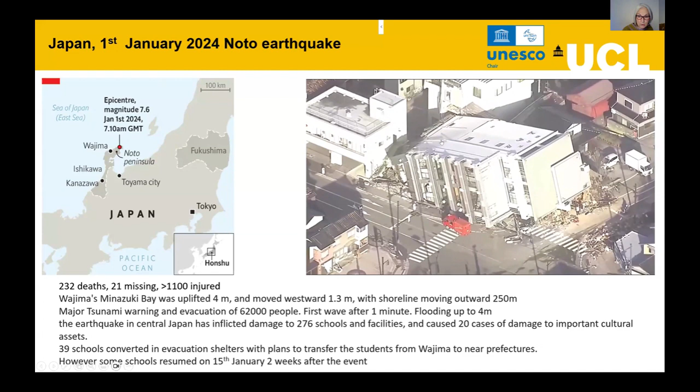Interestingly, 39 schools in the Wajima area were converted to evacuation shelters, with plans to transfer the students from Wajima to nearby prefectures so as not to interrupt their education. And quite interestingly, some schools managed to resume education after the 15th of January, i.e. 2 weeks after the event.

As some of this audience may know from our previous conversations, why is that? We have done work on trying to minimize education disruptions. This was a project that we ran with UNESCO Paris in the Caribbean, and the project has now concluded. You can actually access the results on this link, which will be in our recording.

Basically, we are looking exactly at what the immediate aftermath of disruptions to educational infrastructure is, in the aftermath of an earthquake or flooding, and how we can shorten the number of days that education is interrupted through preventative measures, mainly by better retrofitting of school facilities.

Very interestingly, in several areas it has been said that the peninsula of Wajima is a relatively less urbanized and more provincial area with an aging population, and therefore fewer resources are being put into retrofitting buildings. This would explain the widespread damage that we have seen in this earthquake.

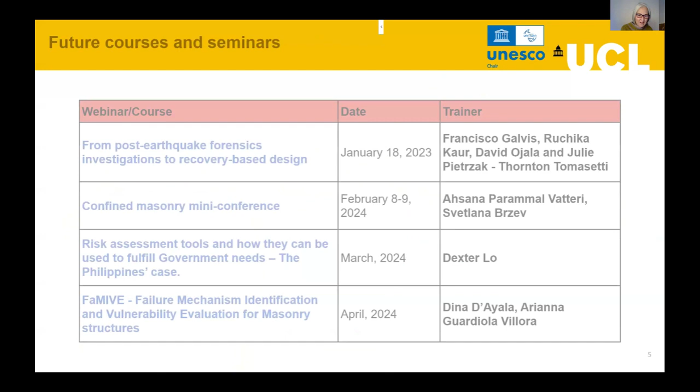Indeed, this approach is part of the talk, the issue of assessing buildings and preparing and increasing resilience. You will see that it's quite an interesting part of the conversation we will have today with the colleagues from Thornton Tomasetti.

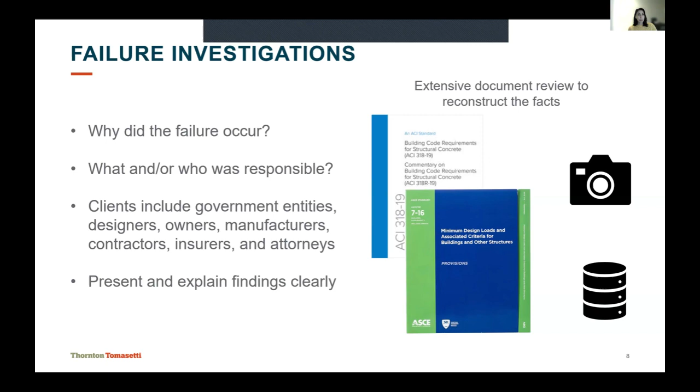Another example of somewhat a failure investigation is emergency response and stabilization. So anytime after a disaster or failure, we come to site and stabilize the structure. We define that as this area.

I'm going to show a video of a telescope collapse, the Arecibo Observatory telescope collapse in Puerto Rico. I'm not sure if you guys are aware of this, but this happened a few years ago. This is a single dish radio telescope in Puerto Rico, and it actually was featured in one of the James Bond films, so it's somewhat famous.

This telescope weighs about 900 tons, and it's 305 meters wide.

Initially, when we were engaged on this project, we were told that only one cable had failed, so we were asked to look at the cable that had failed. During our investigation, a second cable failed. At that point, we started doing calculations for the loads on the other cables and determined that if no repairs were done, this satellite dish or telescope could not hold the load any longer and would eventually collapse. On the day of the collapse, we actually had a drone inspection, and we also have a video of that.

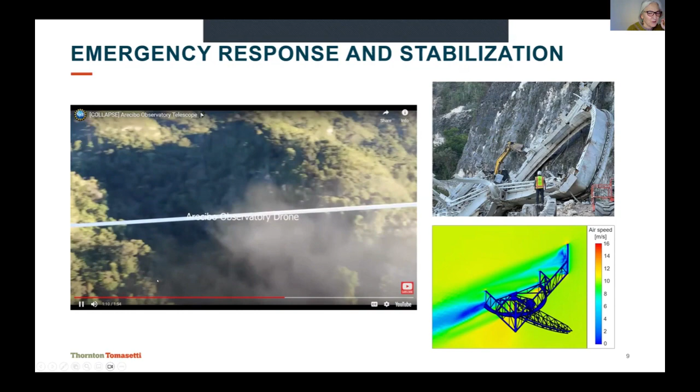So this is showing the failure at the cable socket. We served as the engineer of record and provided an investigation, forensic analysis, and repair recommendations for this failure. We also determined the cause of the collapse and oversaw the demolition for this site.

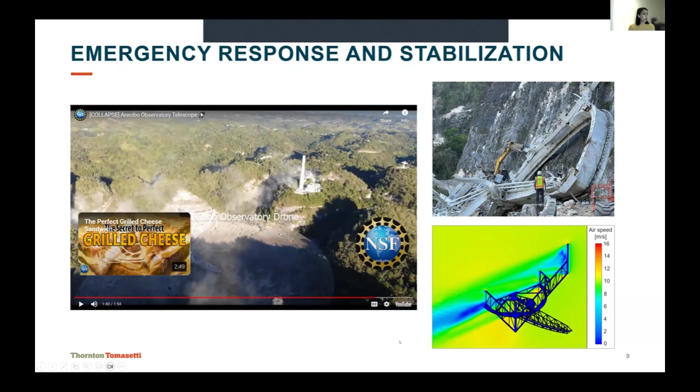Another part of our firm does advanced analysis. It's essentially using scientific approaches to solve more complex problems that go beyond the usual. We're using structural mechanics and experimental mechanics to do this. We're using linear and nonlinear analysis to characterize the static and dynamic behavior of structural systems.

I have another video, and this is an example of controlled demolition. This was a partial collapse at Hard Rock Hotel in New Orleans, Louisiana, about 2 years ago now. Our team responded when the structure was unstable. So the structure during construction was unstable, and also there were 2 cranes on top of the building left dangling. So our team came up with a plan and used explosives to bring the cranes down. One of the major goals we had was to protect the adjacent buildings.

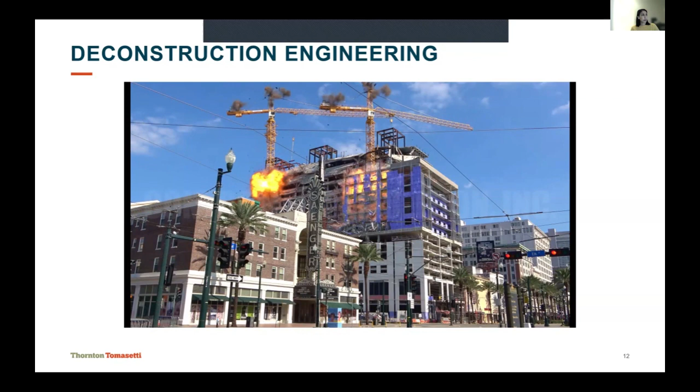So when we decided to use explosives to bring down the crane, we did models and analysis, and the results aligned well with our expectations, and we were able to protect the adjacent buildings from further damage.

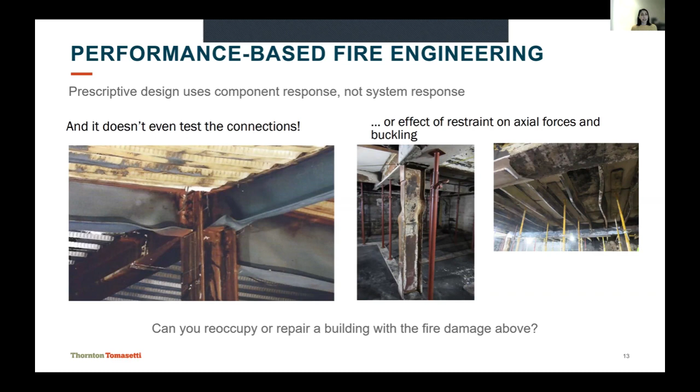Quickly, another thing I want to mention, part of our practice also does performance-based fire engineering. Just like we design for earthquakes and winds, we also design for fire. In the code, there is a prescriptive design that uses component response and not necessarily the system response. It doesn't test connections or the effect of restraint on axial forces or buckling. When we do performance-based design engineering, we're using realistic fires and understanding realistic structural response. In the end, this analysis is helping create a more resilient and safer structure.

So I'm going to move on to the second part, which is lessons from forensics projects. This is based on my experience in Christchurch in New Zealand. I'm hoping this can showcase how recovery can happen after a disastrous earthquake.

Christchurch, New Zealand had 3 major seismic events within a year, known as the Canterbury seismic sequence. The first seismic event was a 7.1 magnitude earthquake on September 4, 2010. The damage was relatively minor throughout the city or even the country. The second earthquake happened on February 22nd, 2011. It was a magnitude 6.2 earthquake, but the epicenter was relatively close to Christchurch Central Business District, and it was a shallow earthquake. It was quite disastrous for the downtown or the CBD area.

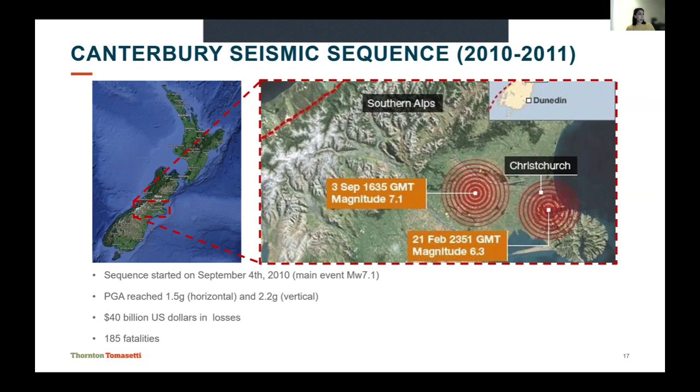Here is an example of a recovery process for a building that was insured. In New Zealand, the majority of properties had insurance, and in some ways that led to a lot of disputes and delays.

There was a particular phrase in the insurance policies requiring buildings to be reinstated substantially the same as when new. That little phrase caused a lot of dispute between owner expectations and what the insurance carrier was willing to pay for repair.

It was a 7-story commercial building in Christchurch, New Zealand, close to the Central Business District, designed in 1985. The gravity system was precast, pre-stressed beams and cast-in-place columns. The lateral system was an eccentric concrete shear wall, shown in the highlighted region, the 4 walls at the bottom of the page. The foundation was bulb piles and tie beams and spread footings under the columns.

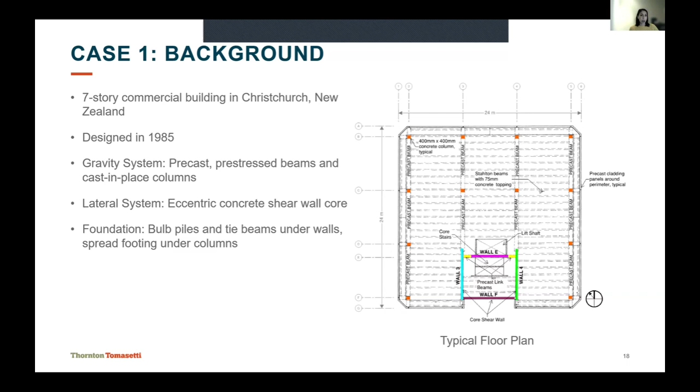This type of construction was pretty standard in New Zealand. They used a lot of precast and pre-stressed members, and concrete was pretty widespread.

We were engaged in 2014. Just a reminder, the Christchurch earthquake disaster was in February 2011. We were engaged in 2014 to assess the extent of earthquake damage, provide repair strategies, report the building percent NBS, and provide any conceptual strengthening.

That percent NBS—NBS stands for New Building Standard. It was an assessment of an existing building against current building standards and code load forces: what could the existing building withstand using current loads? That percentage was defined.

Anything less than 33% NBS was considered earthquake prone and required strengthening for reinstatement of the building. So it was important for us to identify if this building was earthquake prone during our repair recommendations. Here's some of the damage we found during our investigation.

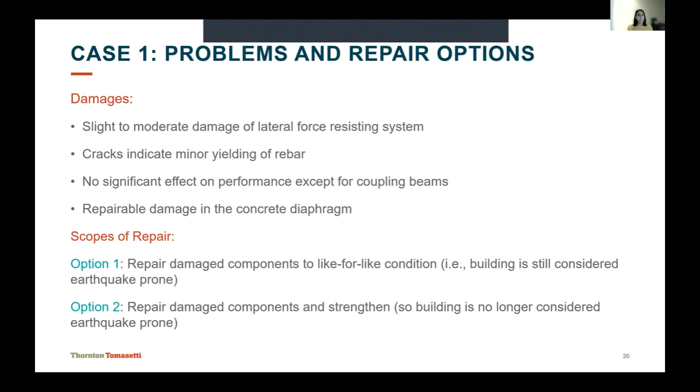Now, I think this is the more interesting part of the recovery. The earthquakes happened in 2010 and 2011, and we were on site about 3.5 years later evaluating this building. Between those years, there was a lot of work going on, and this is what was happening.

Initially after the earthquake, from May and June until November of 2011, investigations were done. An engineer was engaged who did post-earthquake structural inspection work. There was geotechnical investigation done, and a verticality and floor survey done. The geotechnical investigation proposed installation of steel screw piles to reduce the risk of liquefaction in future events. Even though this building hadn't settled, there was a risk of liquefaction they wanted to prevent for future events.

Then in May 2012, there was hardness testing of reinforcing steel done, to see if there was any yielding of the rebar or not.

Then in August 2012, a Royal Commission report came in. This mattered because it opined on the performance of eccentric shear core walls, essentially saying it was an undesirable system leading to an undesirable flexural-torsional response, which could initiate shear failures in the core walls.

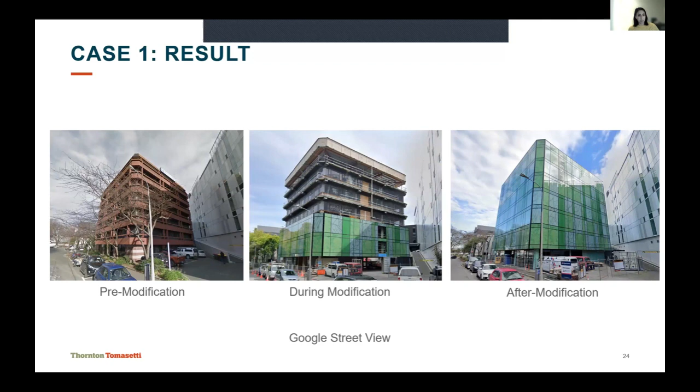So this one was also a building in the central business district that I looked at. It was a 14-story hotel, and it had a 3-story podium adjacent to it that was seismically separated. It was built in the same era as the previous one, in 1986. It also had precast interior concrete beams and columns. The lateral system was cast-in-place perimeter concrete moment frames.

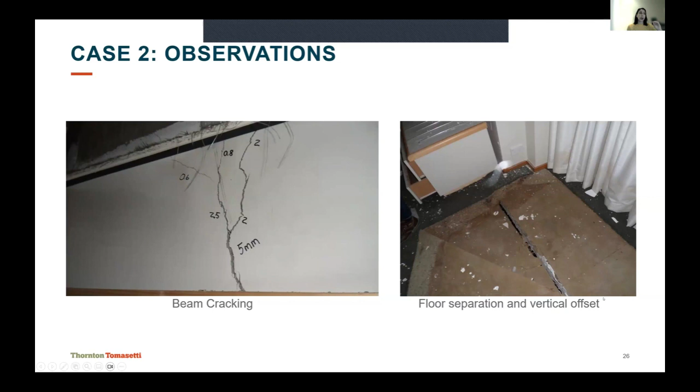As I was mentioning, precast stairs were quite common also in these buildings. In this particular building, on one of the stairs, the entire run of the stairs dropped. The connection at the landing pulled out. And the remaining stairs that were still there had quite extensive cracking. There were lift core walls, elevator core walls, that had extensive damage at the top floors. There was a lot of spalling and cracking. In this particular building, we did find the top 3 stories had a lot more damage than the lower floors.

As part of the study, we did a verticality survey, and there was no pattern in the horizontal offset movement. We also did a floor survey, and we found there was a perceptible and measurable slope towards the middle section of the floor, and it was worse on the top stories than the lower floors. This could be attributed to shortening of lift core walls caused by the structural damage. We didn't find any damage in the basement or at the lower floors that indicated that the foundation had failed.

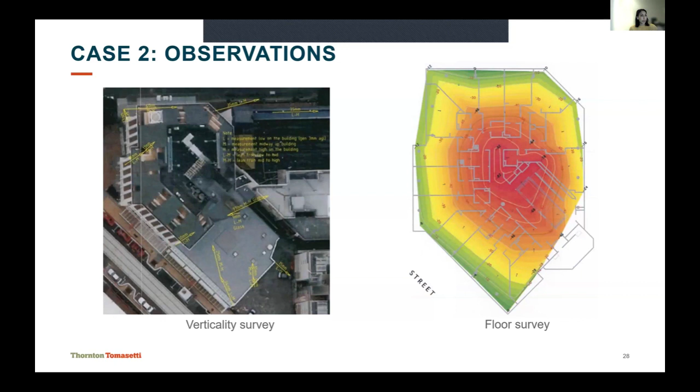So part of this exercise was understanding the extent of damage in the entire building. When we were looking at this hotel, everything is covered in finishes. So we had to estimate the extent of damage from the limited finishes we removed. So here's the extent that we estimated. For the tower building, we estimated 30 to 50% structural damage. For the podium building, there was less damage, so about 10 to 20%. And similarly for non-structural, we created percents.

We also did a study to determine the NBS, which is what percent, whether this building was earthquake prone or not. Our initial findings were that this building was not earthquake prone. It was about 40% of new building standard. We provided repair schemes, which included epoxy injection of beams, replacing moment frame beams that were extensively cracked, removing and replacing the entire topping slab, and then new concrete columns and walls on the top 3 floors. So we were just removing the top 3 floors and replacing them. And all the stairs were being replaced as well.

So based on that, a cost estimating exercise was done, and these were the results. The cost estimate for the tower building, the 14-story building, was that it would cost about $36 million to repair the scope that I just described. And there's a little asterisk to it because there are what we consider risk items that are not fully defined, which included additional moment frame replacement that we weren't able to see. There could be additional diaphragm cracks that we weren't able to see. Same thing with beam cracking.

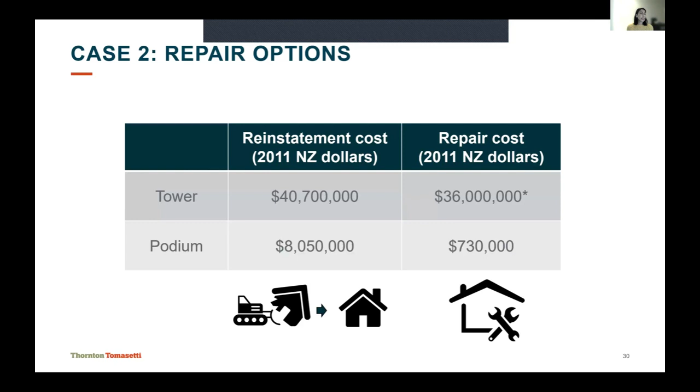So after this study, we were on site soon after the earthquakes. The earthquakes happened from September 2010 to June 2011. We were on site from June to September 2011, issued a report, and ultimately the decision was made that the building would be demolished. So the owner got, give or take, $40 million to repair or rebuild the buildings.

The owner decided not to rebuild the building. To this day, the site is empty. So here's an image of what the building looks like: the 14-story hotel, well, this image is from 2017, but in 2011. The building was demoed, I think, around 2013. And here is where the building would have stood.

I just want you to note the surroundings. Christchurch originally had a lot of brick infill construction as well, and a lot of concrete construction, which you can see from here and here. As of today, the latest image we have, nothing has been rebuilt on site. This is 10 plus years later, and the surrounding sites look quite different. As I was saying, the rebuilding in Christchurch is using a lot more steel and glass, which wasn't what was used 20, 30 years ago.

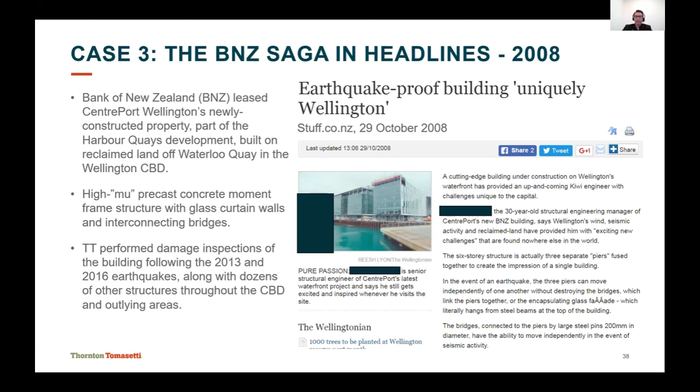By 2014, the building hasn't been open all that long and we get this headline: 'BNZ building faces a quake poser.' And if you're an American like me, I had to Google this one—a poser is a particularly difficult question or puzzle.

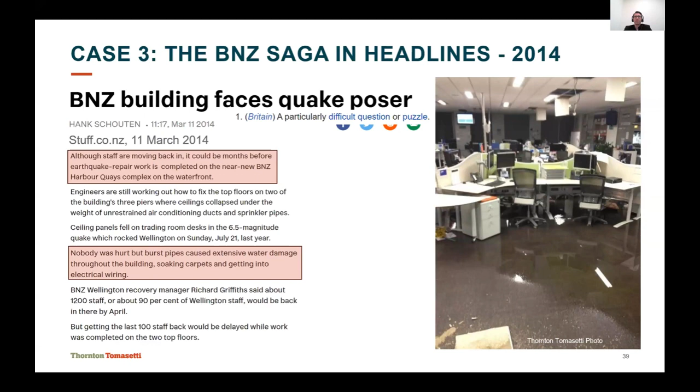After the 2013 earthquake, as you can see from this photo, there was very extensive non-structural damage. It occurred during off hours, but this really could have been pretty hazardous—relatively lightweight hung ceiling finishes, but also a lot of ductwork and cable trays came down. This article from 2014, about 9 months after the earthquake, says the building is still not completed. Some people moved back into certain areas, but water pipes burst and the building was flooded. So it was really just this non-structural damage that knocked this building out of commission for such an extended period. Already the public and occupants were relatively upset with how this supposedly earthquake-proof building had performed.

We move ahead to 2016, after the Kaikoura earthquake. This headline shows up: 'BNZ building damaged in 2013 quake appears extensively damaged.' There's no photos shown here, but really what we're saying is engineers are still unable to access the building to do their inspections. When we eventually did, here's the sort of conditions we were seeing.

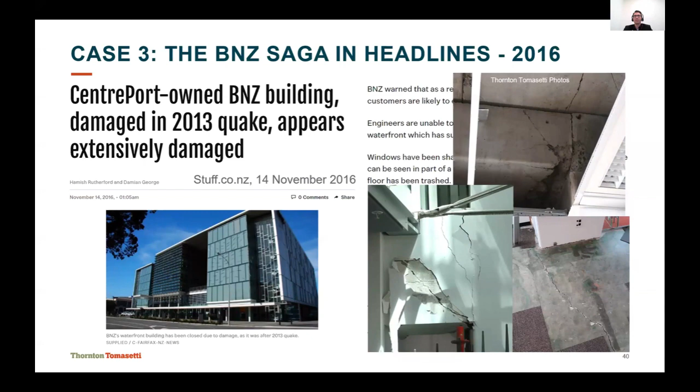Not necessarily as severe as some of the photos Ruchika shared, but still some engagement of the concrete frame, cracking of the precast concrete floors, and definite engagement of the ductility of this building—although no partial collapses, nothing like that to speak of.

A little bit later in 2017, another global article talking about the lack of performance, continued issues and safety issues. This article goes on to highlight a lot of buildings that remained closed, remained in dispute, and were unoccupied at the time.

On 10 November 2017, a year on, the building still lies empty with little sign of activity, but the story remains the same. The building's owners cannot say whether it will ever be repaired. It's up in the air because we're still working with our insurers with respect to the claim, is what the finance director says.

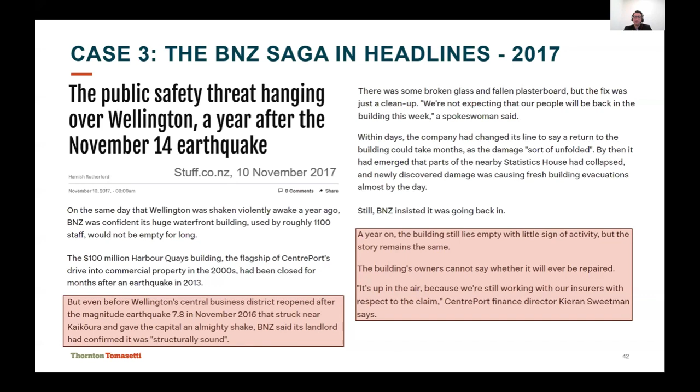Finally, about a year after that, in October 2018, it's declared that a settlement has occurred. This is where TT's work on the building started to wrap up. After 2 years closed due to earthquake damage, the landmark former BNZ building on the waterfront is coming down. CentrePort, which also suffered extensive damage to its port infrastructure, has confirmed it will not be building another commercial property on the site. And so that seemed to be the end of this one.

Again, another 2-year process before this was resolved, back and forth with a lot of debate between engineers, insurance companies, owners and tenants, frankly. At the end of the day, a building that may have been repairable was brought down, and a major centerpiece of what was supposed to be the new modern downtown for the city remained barricaded, and ultimately it was demolished.

But that wasn't quite the end of it. Things continued, and in a country like New Zealand that, as I found, isn't really that litigious, things got a little feisty in the news after that point. So the building comes down, and then claims start to show up about why the building did so badly.

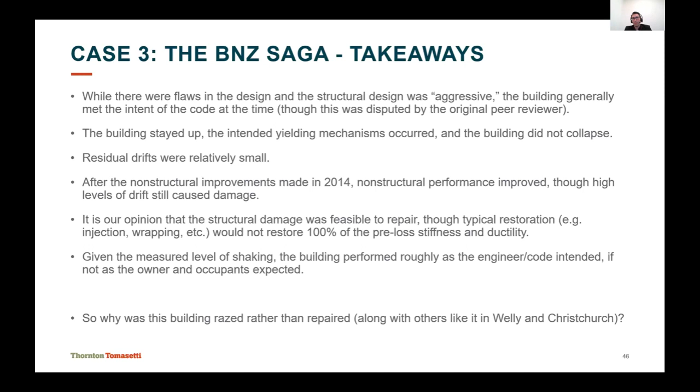Given the measured level of shaking that they had, I think the building performed roughly as the engineer and the code intended, but clearly not as the owner and occupants expected. So why was this building razed rather than repaired, along with a lot of others like it in Wellington and Christchurch? There are a number of factors that play into it.

It's never just a single-sided piece. Some of the factors that went into the decision to demolish it were that the designer and contractor really had the inability or unwillingness to trust their own designs, and challenges assessing how the building had actually performed—whether that's the amount of yielding, how to interpret the drift it had gone through. That affected their ability to confidently vouch for the future performance of the building. Essentially, the question is: can it handle another one? And if they can't confidently say yes, that's going to hurt public trust and owner trust.

We did see changes in the commercial real estate market dynamics in that area. The city hadn't been blowing up the way they thought it would when it was originally designed. It was a little further from the city center, and it just wasn't a popular place to be anymore. So there was a loss of market value associated both with that, as well as the fact that it was damaged. And this was all playing out in the news.

I think the inability to restore that full original strength—to get the building back substantially as when new, as the insurance policy was written—impacted things. Is that reasonable if the owner is self-insured? I'd maybe argue that if there were no insurance promising to put this thing back as when new, an owner would have gladly done the epoxy injection and wrapped it, and it would have performed pretty dang well. But as a commercially insured property, I don't think that was going to fly.

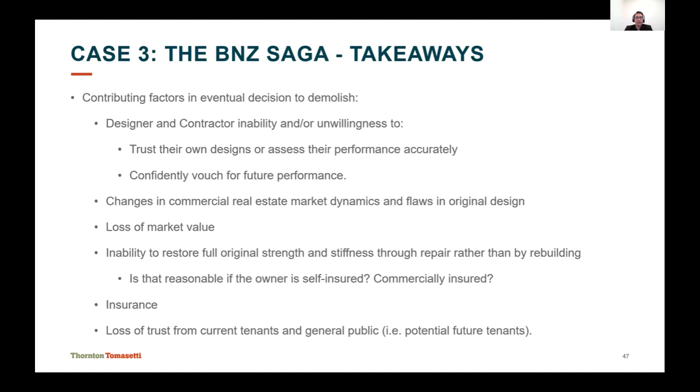And that level of trust is hard to win back. I think we see it now, perhaps in the change in construction methods we're using, and the fact that, say in Christchurch, some of these buildings just aren't back anymore. People are maybe moving and deciding to live in other places and occupy other structure types.

So I wanted to touch on that other point of insurance, which has been hanging over a lot of the stories that Ruchika and I were telling here. As a quick example of how this applies, Marquis and co-authors wrote an excellent paper—I've got the citation here, and I'd really recommend reading it—on the complex world of post-earthquake decision-making in Christchurch following the CES. While he didn't go into insurance in as much detail as I'd have liked, and I'm looking to help contribute to the literature on that point, one thing he points out is that in New Zealand, approximately 80% of the losses in Christchurch were covered by insurance.

And that level of market penetration is way higher than Japan, Europe, and other places, where even at the high end, 20% or so is about what we're looking at. So the fact that there's that high penetration of insurance, along with some of the particulars of the policy language, meant that insurance really played a huge role in the earthquake recovery in Christchurch and Wellington.

And it's unclear if it would play the same level of a role in, say, the United States, in California, when we have our next big earthquake here. There's a couple of common phases that I see in terms of owner and landlord response related to their insurance, or potentially their lack thereof, that happen in these events.

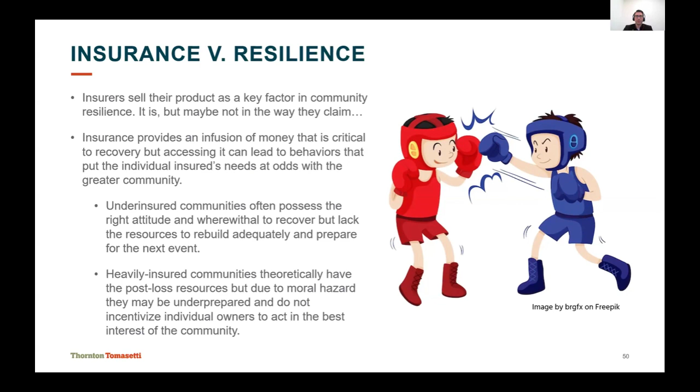So I think that the topic needs some rethinking in the industry. It is a critical element in building communities, but I think some restructuring is necessary, looking into some different insurance products that might be more impactful - parametric insurance. A colleague of mine who works at Jumpstart Insurance gives kind of quick $10,000, $20,000 payouts to people based on level of shaking to help them address some of their immediate needs. That may be something that helps resilience without kind of hindering and waiting for large payouts.

And the fact that what we're seeing these days as the level of natural hazards increase through the country, through the world, is that insurers are pulling back. The market is hardening. It's harder to get insurance, and it's hard to just say, hey, I got insurance, so don't worry about it, I've addressed my risks. And in that world, there's a possibility where those investments in hardening your structure, resilient retrofitting, may offer better returns on investment than they have in the past.

So yeah, those are a few of those thoughts. Obviously, it's a topic for another time, but that combined with some of these prior claims was a lot of the lessons that I think we pulled out of New Zealand.

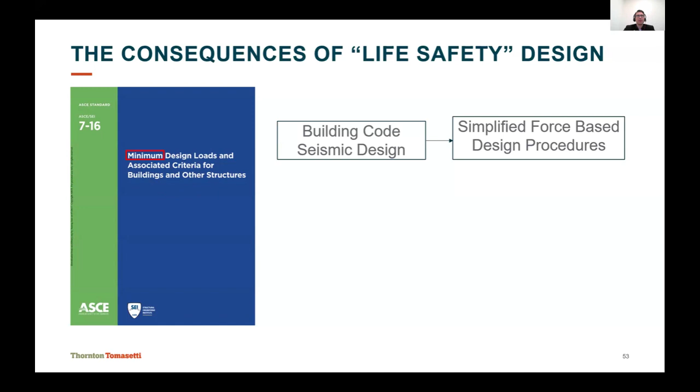We're probably preaching to the choir here a lot, but what you've seen is some examples of what this kind of modern life safety approach to design is getting us, and what it looks like in practice. ASCE 7 gives minimum design loads and associated criteria for buildings. And again, the target here is just life safety at that design basis earthquake, collapse prevention in that rare kind of biblical MCE event for at least a risk category 2 building.

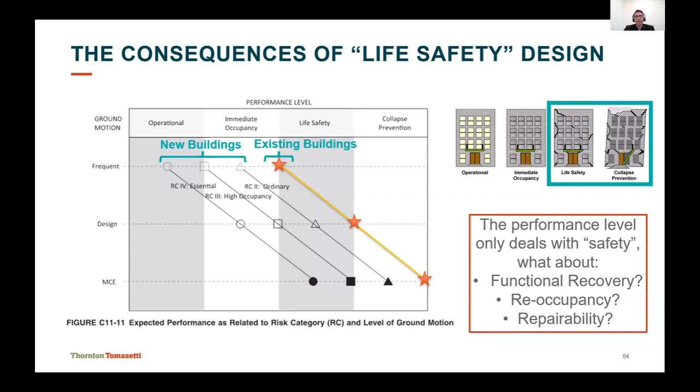And for existing buildings, right, we accept an even lower tier of performance for that in terms of retrofit and the standard we need to hit. But it's focusing on safety, and it really doesn't touch on functional recovery, the need to reoccupy, and repairability, all of which we see came forward in the case studies that we put forward so far.

And so, one of the things we found here in our proactive consulting work moving forward is that clear, real examples help, because convincing owners to move on from this bare minimum and do a little bit more is really at the crux of what a lot of us want to do. We want to encourage that next tier of behavior. And it takes a lot. I mean, both making the economic argument, but also sometimes driving things home in different ways. And we've found that having these examples helps, and using our personal experiences from these events helps.

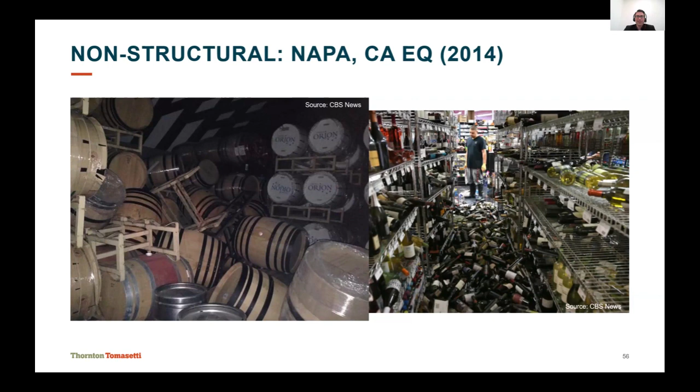So from a non-structural performance thing, here's some examples of what we touched on. Napa was an earthquake that occurred close to us in San Francisco. We all love wine. Images like this are just catastrophic, right? And not just because we hate to see some good wine go to waste, but also because this is the business, this is the economy of that area, right? And so there's actually been a lot of work that's gone into appropriately anchoring wine barrels and those sorts of facilities after earthquakes that have happened there.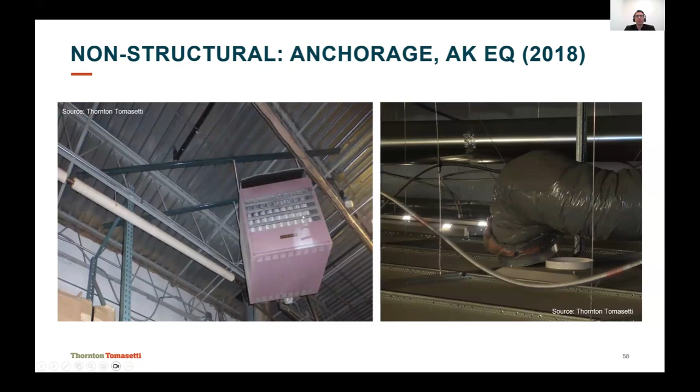Anchorage, same sort of story. We have one more good oscillation, and this heater probably would have come down in the middle of this warehouse and taken out some of the storage racks along with it. MEP lines failed. Here's an example that has actually been very effective for me lately. These are two offices on the same floor of the same building, just across the hall from each other. The building structurally performed very well. The difference is that they were built out by different firms using very different methods.

So this one on the left, poorly braced hung ceilings went, fractured a sprinkler line, and flooded the building. And if it hadn't been for that, the office across the way would have been perfectly fine and able to continue its operation right away. But it's not just isolated to earthquakes.

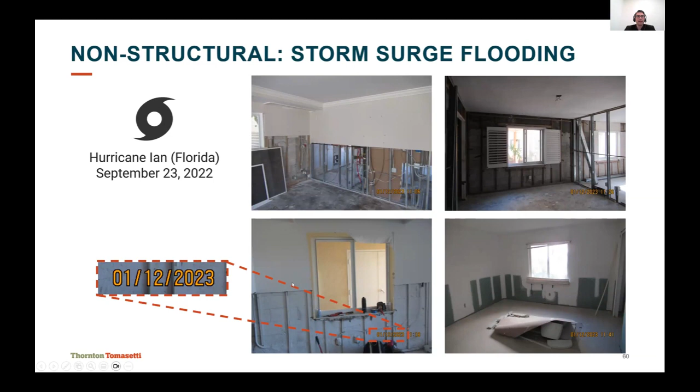Here's some examples of it taking essentially several months after a hurricane to address storm surge related flooding issues from Hurricane Ian work we did in Florida recently. And then even winter storms. Here's where my search and rescue team went out this past winter to the Mammoth Lakes area in California.

Obviously, tons and tons of snow and no place to put it anymore at some point. And while obviously it led to roof failures and collapses and things like that, one of the issues is that all this snow piles up and can impact some of the utilities. So a lot of propane lines, either local tanks or local systems, are fed in the house by an external exposed pipe that comes up, makes a 90-degree bend, and goes into the house.

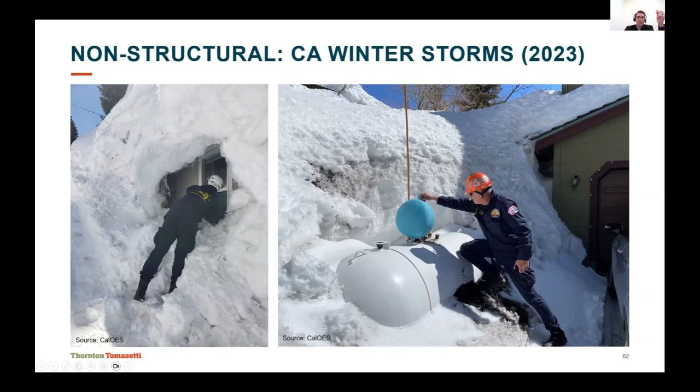All the weight of snow and ice, and during the melting process, can separate those gas lines from the building itself. The gas can then leak through the building or through the snow, even tunneling its way into different areas. Somebody turns the lights on or tries to light their stove, and there can be catastrophic explosions. And so we see a couple of examples of what that looked like here.

So we don't think of non-structural hazards for winter storms either, but if we're not thinking resiliently about the hazards these events can pose to all aspects of our building, not just structural, we can be left pretty vulnerable as well. So here was supposed to be a checkpoint. We just had some questions. So I'll just let Francisco continue on and pick up his end of the presentation and talk a bit more about some of the life safety issues here.

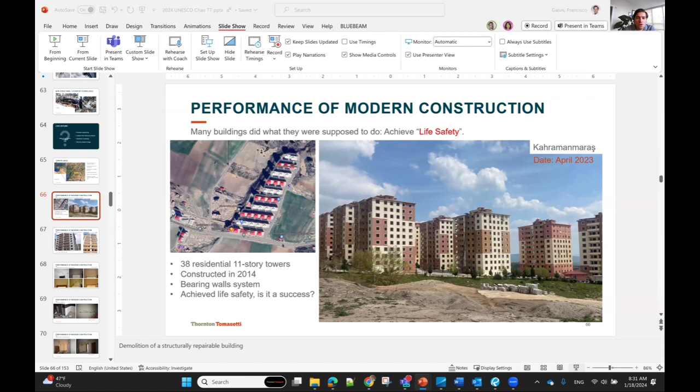Super. Thanks, David. All right, let me get this going. There you go. All right. So now, can you all see my screen? Yes. Okay. Great. Cool. All right.

So I'll introduce myself first. I'm Francisco Galvis. I am a project engineer at Thornton Tomasetti in the San Francisco office. I sit in the forensics practice, but also work with the resilience practice, so I'm kind of working in both. I started my career, like Ruchika and David, in design, but of bridges in my case, in Colombia. I'm originally from Colombia. I worked there on bridges for a few years, and then moved to academia for my PhD. That's when I came to California in 2017, and a couple of years ago joined TT to work more on the forensics and resilience practice.

So through that experience in forensics, I had the opportunity to go a few months after the Turkey earthquake in February this past year on a reconnaissance mission that the firm conducted. So we went to the southeast of Turkey to witness what had happened there. As I'm sure all of you know, this was a really devastating earthquake sequence that claimed more than 50,000 people's lives and caused more than 80,000 building collapses.

And there's a fair amount of interest in this devastating event and a lot of research and reconnaissance on the collapsed buildings. So we turned our eyes to what happened to the buildings that didn't collapse and that performed as they were supposed to perform, right? That they achieved life safety performance, given that this event was pretty close to, and in some cases exceeded, what the equivalent MCE would have been for the area.

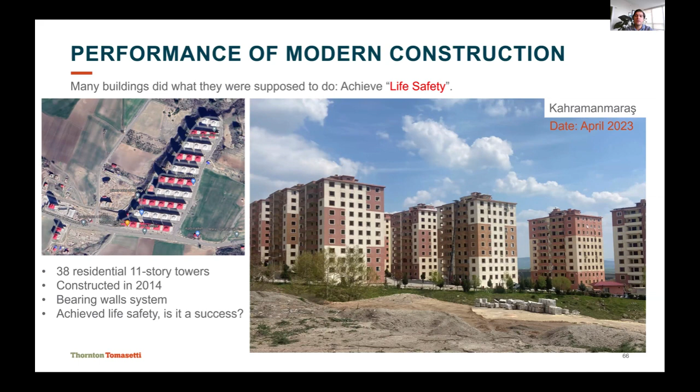So we went closer to one of these buildings and tried to understand what drove that demolition decision. And a lot of the points that David and Ruchika touched on earlier in their New Zealand examples come up here again, but now without the insurance situation. And I think this also addresses one of the questions: what would happen if the insurance penetration is not as high?

And maybe this is one of those case examples. So in this case, this building had some exterior damage. You can clearly notice which buildings were reinforced concrete structural walls and which part of the building was just brick walls, which had severe damage, but still no residual drift that would be immediately concerning. Then we went inside the building and tried to look for structural damage that would definitely indicate that we should get out. And we didn't find anything that would be structurally really concerning, right?

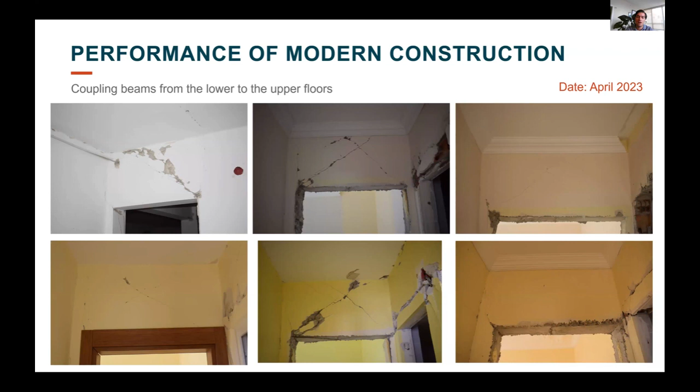We did find, of course, the structural elements engaged, right? So you see some of the coupling beams having some cracking and stuff like that. You also see some damage on the walls around the elevator. You start seeing maybe the cold joint not handled pretty well, but nothing that would indicate this is at the verge of collapse or anything like that.

However, walking through this building and looking at the non-structural damage, the feeling you get, especially if you're not an engineer, is way different, right? So you see all of these cracks everywhere and a lot of damage on the non-structural components that are scary. So the damage to infill walls, and this has been said many times, was a major predominant issue. These rigid partitions are not well isolated from the structure, and that scares everybody, right?

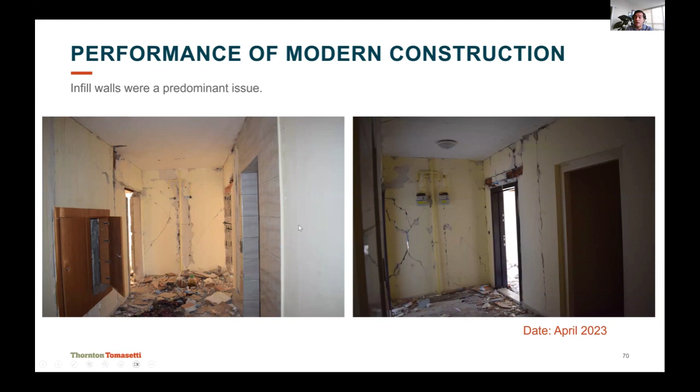And then what happens is that, this past month, these demolitions are already underway. So it really makes us pause and think: these buildings didn't do anything different than they were supposed to do, right? They moved, they dissipated energy, they didn't collapse, they allowed people to evacuate. So from the eyes of the building code, they are kind of a success. But is it really a success for the community and for all of those around?

We estimated around 7,000 people who lived in this fairly new neighborhood are displaced, and who knows when they're going to be able to go back and have a proper place to live. So that, I think, would be one of the things to consider when we think about the consequence of life safety. Not only the smaller events that affect mostly non-structural components, but also the larger events that create structural damage and other consequences.

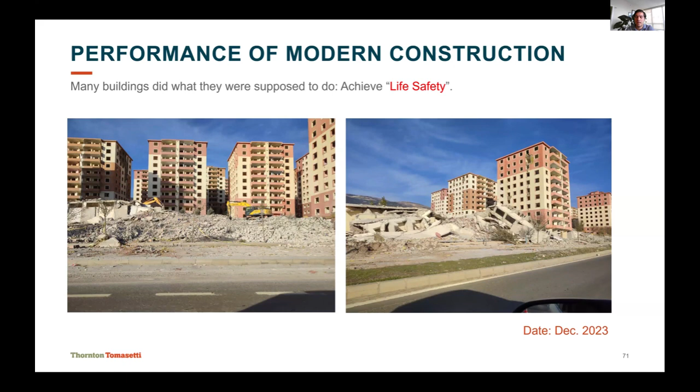So I think the message here is that building codes are meant to prevent collapse only, and that's something that doesn't really register with everybody. We engineers know, but we are also responsible to communicate it well, especially to those making decisions, either private investors or public entities, so they really know and understand the consequences of this, and these examples can really show it.

As David and Ruchika mentioned, the non-structural damage is the main driver of losses in most cases. And there is a huge portion of loss that comes not from damage, but from business interruption, and from all of the consequences of not being able to use a building after an event happened. And that's something that needs to be considered in the decision-making of anybody thinking about developing a project. So that's the example we had on Turkey.

And with that, I want to give the mic to Julie, who will now walk us through another type of event, a hurricane, and how that resulted in our resilience consulting practice.

So Julie. Yes, just a second, considering you have a checkpoint and there are questions that relate to resilience. Between reinforced concrete and steel structural systems, which one do you consider more resilient? The question is from John Lawrence Twala again.

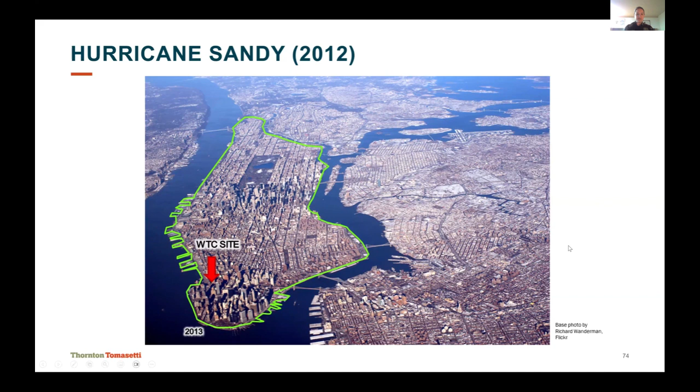So you can see here the difference of the Manhattan shoreline. That 1650 yellow shoreline was the original outline of Manhattan Island, and of course we went through and filled in much of this land, where you can see the green line showing the 2013 outline. Then there's the World Trade Center site located to give some proximity of where we're looking. The very interesting thing is when you look at the Hurricane Sandy inundation map, it looks very similar - the amount of land flooded during Hurricane Sandy in Manhattan looks very similar to this historic map. So we recognize we've filled in land, but here you can see the inundation map and how that relates to that 1650 outline, with different depths shown here from FEMA flood maps.

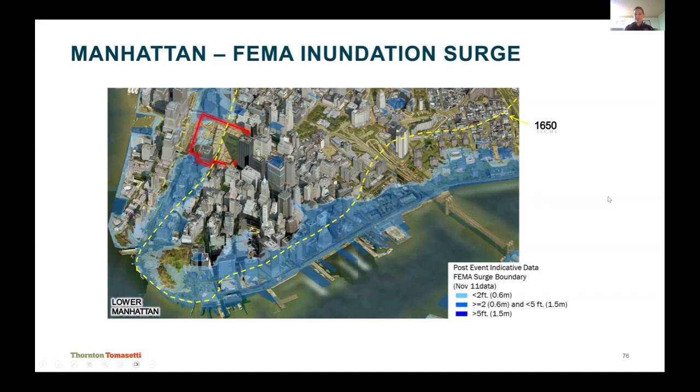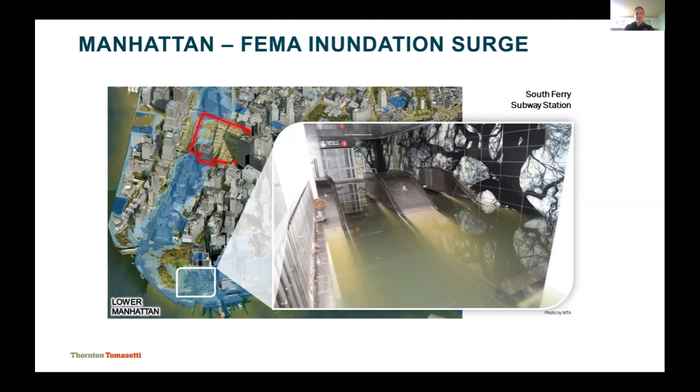And then this is another location in Lower Manhattan, where you exit the subway if you're going to take the ferry over to Staten Island. This is the South Ferry subway station. Clearly there was inundation all the way from that lower platform subway up to street level. So these were the kinds of images we were seeing, and kind of the recovery that occurred after this hurricane.

Here's a video showing the rushing water in this location, and just the magnitude of damage that occurred. So after a lot of reconnaissance following earthquakes, we used these same techniques to respond to this event after this hurricane.

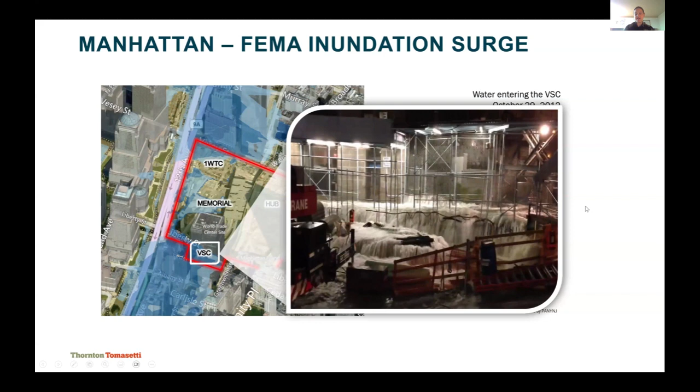So I mentioned already, basically following this hurricane, we decided what can we do to be more proactive, help our clients prepare and adapt to these changing weather conditions in the future, rather than always being responsive and having to rely on insurance for recovery. That was kind of the birth of this resilience practice within Thornton Tomasetti.

So we define resilience as the ability to prepare, endure, adapt, and thrive in a disruptive and changing world. I think that changing world piece is really the key here. We recognize that our sustainability practice is working on reducing greenhouse gas emissions in all of the projects we're working on, but we know that the greenhouse gas emissions occurring today are going to still be contributing to tomorrow's extreme weather. So we recognize that in this changing world and the future uncertainties that will occur, we want to be able to communicate these risks to our clients so that we can prepare and endure these in the future.

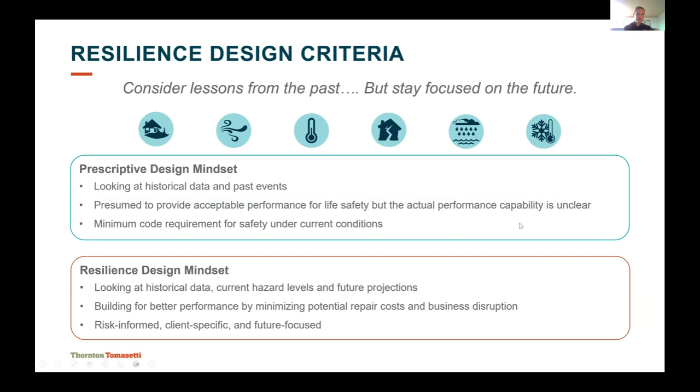And a lot of that has to do with bureaucracy and policy changes that take just a very long time to occur and to adopt over time. So it's really important for us to look at the latest climate science to understand what's happening in the future.

So I want to give a couple case examples of how we're applying this to projects. Francisco will talk a little bit more about seismic redundancy and performance-based design for seismic activity, but I'm going to focus a little bit on this flooding scenario, coming out of what we learned from Hurricane Sandy.

An interesting concept was Sandy was a coastal flood event, and so when we look to the future to see what the preparation is for that type of event, you really have a long warning period. However, in the US and across the world, within the UK, we've been seeing a lot of heavy precipitation events. These are much different. You have very little warning time to prepare for these.

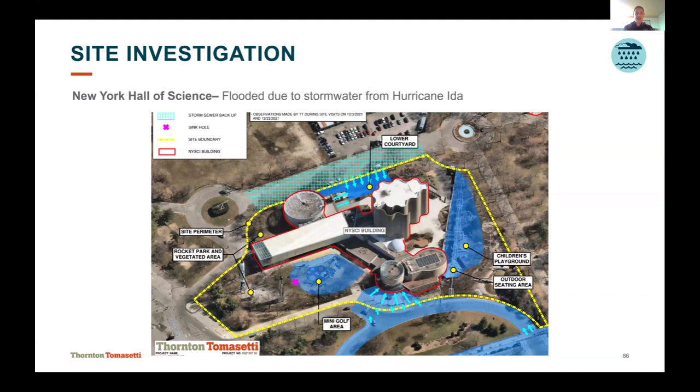As part of this project, the other interesting thing about inland flooding and precipitation flooding is with coastal flooding, we have, in the US, FEMA maps, and elsewhere there are coastal flood maps that can be used to determine what your base flood elevation should be. And then you can use the code to add a level of freeboard on top of that to determine what your design flood elevation should be for a current storm.

And then often we incorporate sea level rise into that design flood elevation so that we are looking to the future. However, when we're looking at precipitation flooding, inland precipitation flooding in particular, you don't often have inundation maps to use. So through our practice, we have developed GIS mapping analyses to look at hydrological analysis at a watershed level to determine depths of water for future precipitation.

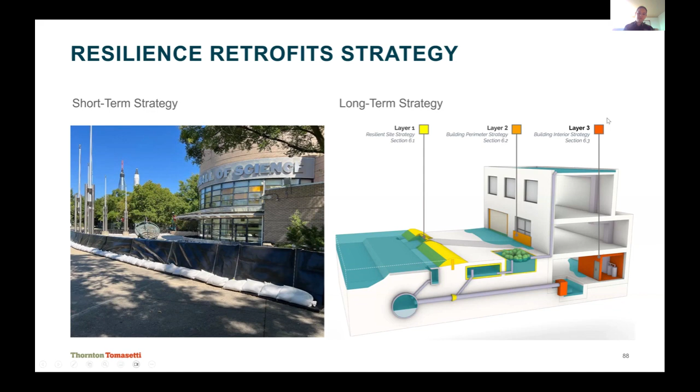This is another project that occurred coming out of Superstorm Sandy, related to coastal flooding. NYU Langone Health is a large hospital complex on the east side of Manhattan. We've been involved with them immediately following Hurricane Sandy.

During Hurricane Sandy, their emergency generators providing backup power were flooded—because the municipal power source was flooded, the hospital would have been out of power, running on backup generators, when those were also flooded. So the hospital lost power. Since then, we've been working with them for over a decade to develop this campus-wide flood mitigation plan, doing that now since 2013.

It includes 10 different interconnected buildings, all existing, some dating back to mid-century. To date—though I think this number could be updated—we've provided over 130 deployable flood barriers.

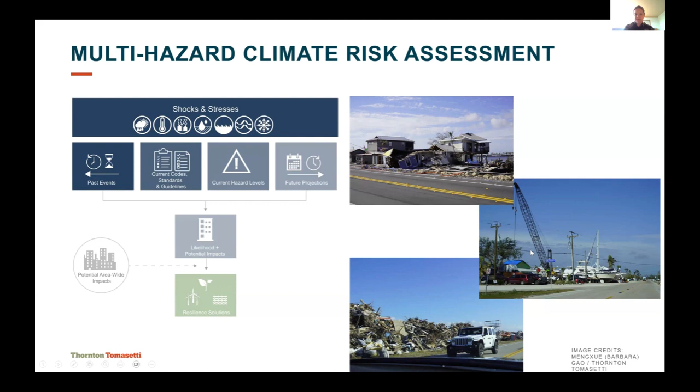At a grander scale, we've also taken this approach, which is really exciting, at a master plan level. So we can look at communities, from a municipality level, to incorporate resilient solutions at a grander scale and really look at how we can make communities more resilient. When we're looking at a master plan, we identify some goals - consistent goals we've developed that we look at when considering resilience for an entire community. We really want to maximize co-benefits, so looking at promoting the natural ecosystem and habitat that exists, and promoting biodiversity to increase public health.

We also want to safeguard the infrastructure that is part of that community. So building in redundancy for energy, transportation and mobility, communications, and then of course, potable water and food systems. Certainly protecting property against damage and property loss, preventing interruptions to business operations.

And then this also leads to promoting public safety during the event, and then also when we're having a recovery from the event, and then overall enhancing the quality of life for the community. So typically when we're working on a master plan, we then can come up with different resilience strategies and design criteria for certain project typologies.

So depending on where the project is located, whether that involves regional flood protection, waterfront revitalization, street infrastructure, or building design criteria, even land use planning and policy, and then considerations for emergency preparedness. And we come up with a toolkit that can be used then by this community in the future to build better.

One example of this was a project that we completed last year in Paysandú, Uruguay. This was a community that had suffered historically from riverine flooding on a pretty regular scale. You can see different river levels that were investigated in the upper left-hand corner, and those lower and upper bounds, and then also what those look like in the future.

And so we took a look at those future levels, and then on the right-hand side, looked at what that regional flood protection might look like in this area, with berms where those needed to be located versus where you had less space and needed to have an actual structural flood wall. And then also some floodable areas that were more wetland and how that could actually be incorporated and used as an opportunity.

So I think the largest lesson learned on master plans, and really going back to that monitor, manage, and improve phase of our resilience approach, is that there are many voices. It's incredibly important to get stakeholder engagement. If you're not empowering those end users to understand why you're doing something or to get buy-in, then you're not getting ownership within the community, and it's the most important thing that we do.

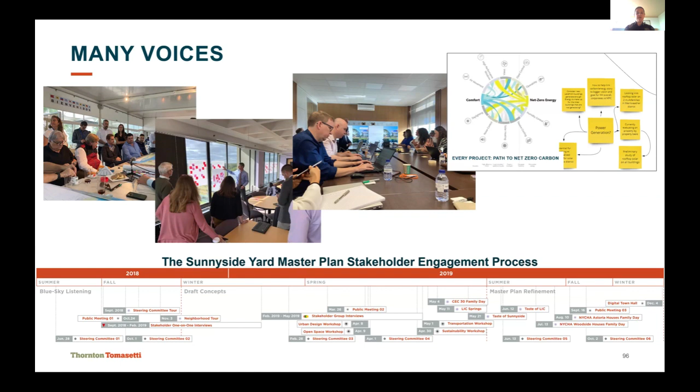So when we're talking about resilience strategies, we really take an eye to climate equity, environmental justice, making sure that every stakeholder is heard, that those considerations are taken into account, and it ultimately ends up promoting a more positive path forward for the project, and solutions that are implemented that many people feel accountable for and have ownership over.

So I touched on this a little bit already, but essentially, once we've decided to come up with a resilience strategy, what that might look like from a conceptual standpoint, implement that, and then construct it, we really work with our clients very closely to come up also with these emergency action plans. So whether that's at a community scale or a single existing building, we come up with these plans that have timelines to deployment or timelines of action.

So with that, we're at another checkpoint, and if there's any questions, I'd be happy to take those. Otherwise, this has been a really great dialogue, and we've got a little bit of time left and a few more things to speak about, but thank you so much.

Yes, there is a very quick question about Turkey, so maybe we can take it now. Francisco maybe can answer that. Was the single state ownership of the whole complex a major factor in condemning the whole rather than inspecting and assessing block by block? The whole development was probably singly owned. Yeah, I don't know about that. That's the Turkey one, right? Yes. Yeah, it's unclear to me if it was singly owned.

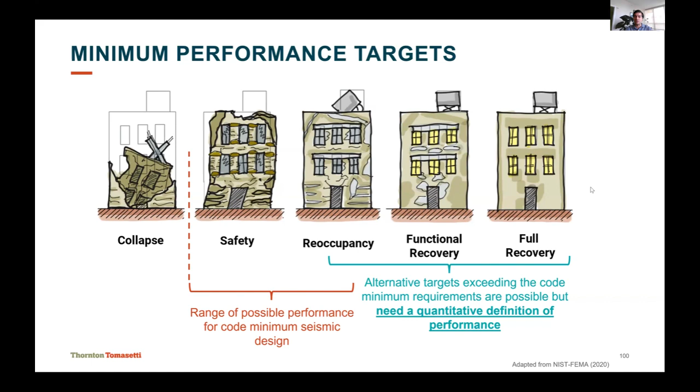But to get to that better performance, we need to quantify performance in specific metrics. The way that shapes out is we try to answer a couple of questions. The first one is, what is the performance of a building, coming back to the case of earthquakes, given a specific earthquake scenario? How do specific design decisions impact that performance? Then we try to quantify that in three verticals: the repairability of the structure, how likely a structure is to be repaired after a certain event, how much the repair costs, and how long it will take to repair, not only to be reoccupied, but for the building to offer its basic intended functions. There are metrics to measure each of these three verticals, all of them involving uncertainty.

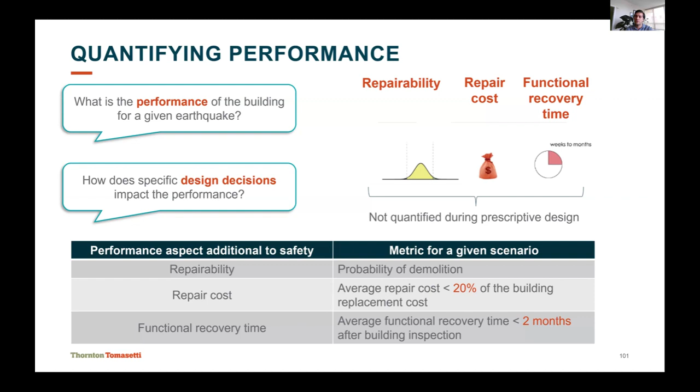So we need to communicate with clients that this is no longer a pass or fail, deterministic answer, but there is uncertainty, and we can discuss what level of uncertainty they're comfortable with. The way we've been doing this is using the state of the art in this type of assessment, which for earthquakes would be FEMA P58. It uses the performance-based earthquake engineering framework, which has three main advantages: it's component by component, considers the uncertainty in every aspect of the risk assessment, and provides quantitative metrics that enable a conversation with a client who is usually not an engineer and doesn't think of earthquakes all the time like we do.

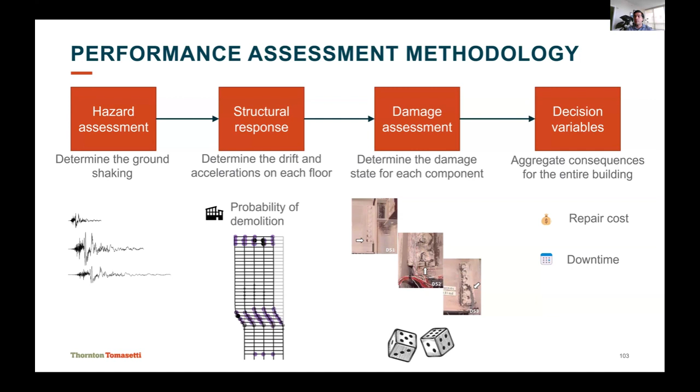This method, in a nutshell, has just 4 modules. It starts with quantifying the hazard. Then for that hazard, we estimate the structural response to determine how much the structure moves. With that, we probabilistically quantify the damage of the different components inside the building, and then aggregate all that damage to estimate decision variables, which are the performance metrics, like repair costs, downtime, and repairability. For downtime or functional recovery time, it's basically simulations of what happens with the building after the event, shown as recovery curves at different points in time. Probabilistically, there are multiple simulations showing how the building goes from its damaged state back to function, or if it's demolished, what the course is after that.

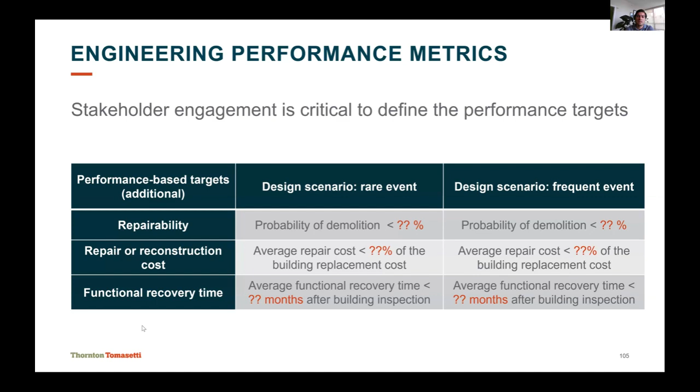The key here, as Julie mentioned, is that stakeholder engagement is critical, because we are now going beyond the code. We are doing something above the minimum, so it's not prescriptive per se. We need to understand what the stakeholder needs, what their risk appetite is, and define the limits of these performance metrics that align with their expectations, their needs, and their budget. So it's important to have a lot of conversations with them to define the metrics that will redefine the basis of design. We originally had 3 case studies, but let's skip the first one and touch on the latest 2, where we put these concepts into practice.

So this is an interesting one because this is a project in the northeast of the United States, an academic facility. This project, still going on, started with coastal flooding, right? So the resilience team got into the project because the client was really concerned about flooding in this area, and they really want their building to be resilient all the way to the year 2100. Right, and that was the perceived most important hazard. So of course it is really important and is a dominant hazard at the site.

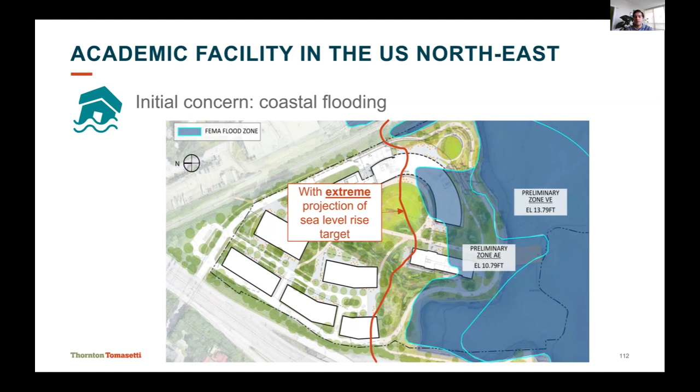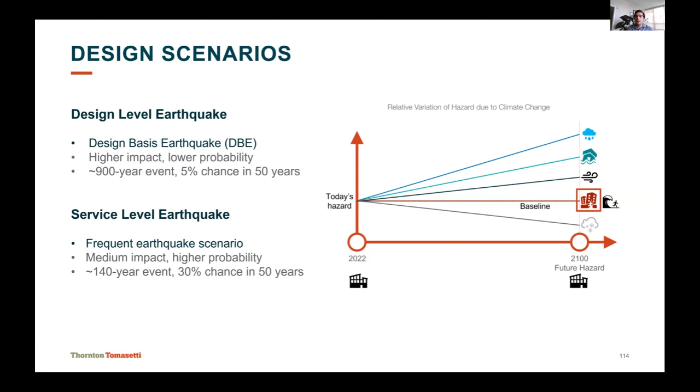So we moved forward with a deeper study on what might be the response of this building. And there are 2 different earthquake scenarios, the design basis earthquake, but then also a more frequent service level earthquake that would be comparable to, let's say, the 100-year flood plus high tide. So that's what we did, using all of these probabilistic methods to quantify this in terms of repair cost and functional recovery time. These are the results for repair costs on this building.

In the service level earthquake, let's say baseline design, this is all code minimum building that the structural team and all the other consultants had already put out in a schematic design phase. We took those drawings, did the analysis, and estimated that for the service level earthquake, this building will have negligible losses. And then for the design basis earthquake, we'll have somewhere about 3 to 3.5%, which is really a lot lower than what one would expect for a code-based building, showing that the building already has, on this baseline design, a better performance than average.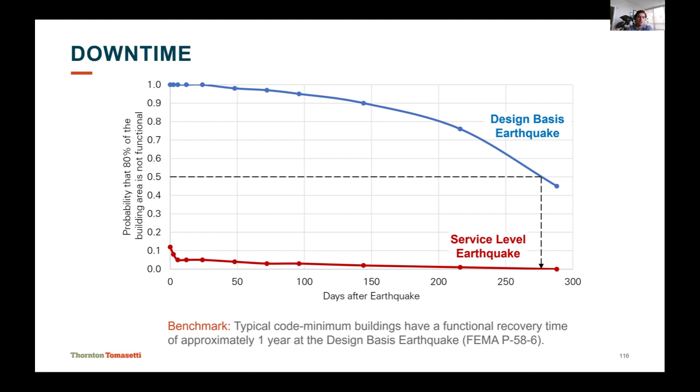And this really resonated with the client, something they are not willing to accept, thinking back to their risk appetite for flooding. So they asked us what they could do to improve this. So we dug deeper into our downtime results to identify possible scenarios of recovery and what is getting damaged that's hindering the fast regain of function. And we identified 4 main things. The first one was damage to elevators. The second one was damage to the HVAC system, both having long lead times to get the equipment to replace what has been damaged. But then there was also some minor structural damage on ordinary braces, not ductile elements, which are customary for that area, and damage to pendant lighting that became falling hazards.

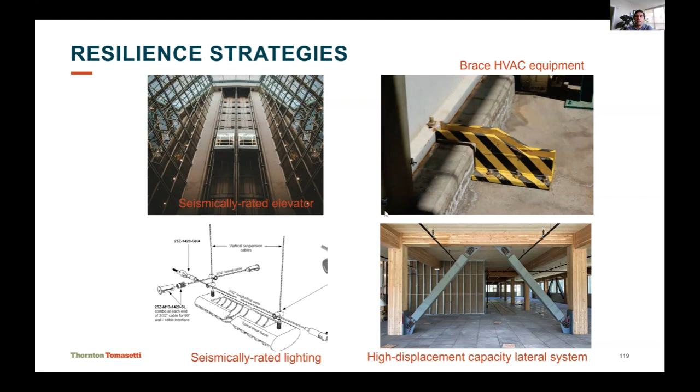So we aligned our resilience recommendations to tackle those 4 topics, right? Say, consider seismically rated elevators rather than an ordinary elevator system for that area. Brace the HVAC equipment for seismic loads, or even a little bit higher, using an importance factor only for that type of equipment. Use seismic bracing on the pendant lighting, and try to consider, instead of ordinary braces, higher ductility systems in this area. All of these things are routinely done in California, but not in the Northeast, and we think they are important for improving the resilience of this project.

But the way we presented this to the client is not like this is all you need to do, but more of a tiered approach, right? Where we say, look, we have these 4 recommendations, but you can stack them and see how that relates to the additional cost, right? So the first thing that we say is, if you were just going to do one thing, focus on the elevators.

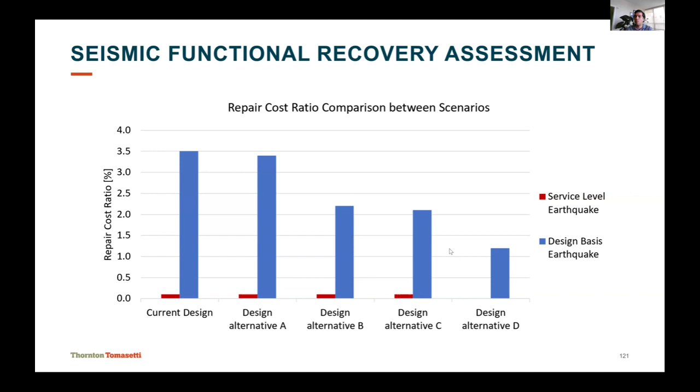So it starts from the 3.5 we showed before on the design basis earthquake to go down to about 1%. It was already low, so this is not really that much of a benefit. The benefit comes on the functional recovery time, where we were looking at something like 10 months or so on

this case is somewhere about $1 million. And this project, for reference, has a total budget of $350 million. So we're talking about 0.3% additional construction cost for this amount of improved performance in terms of recovery.

So this is something that really resonated and is in the higher phases of design, impacting how the project is moving forward. The final example we have here is a bit of a more recent case, where the concern was earthquake from the very beginning.

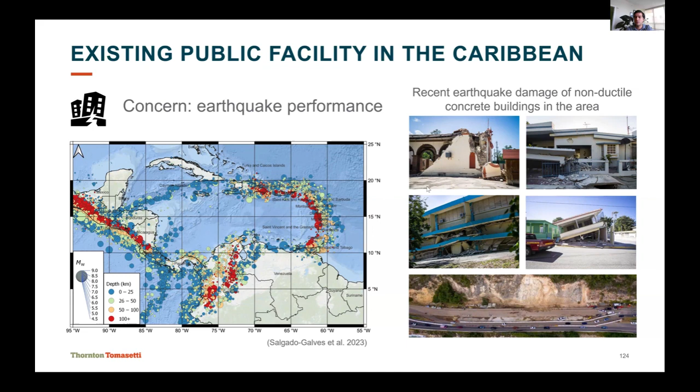There's a public facility in the Caribbean that has seen recent seismic activity and a lot of damage to non-structural components, a non-ductile concrete building. So this is a non-ductile concrete building, existing building now.

It's not a new design, so there are different challenges that arise from having an existing building. In this case, the building code, ASCE 41, already has two scenarios, 2E and 1E. We propose to have one additional scenario that we're calling the BSE-0E, which is a 30% chance in 50 years, a lot more frequent event, to estimate performance.

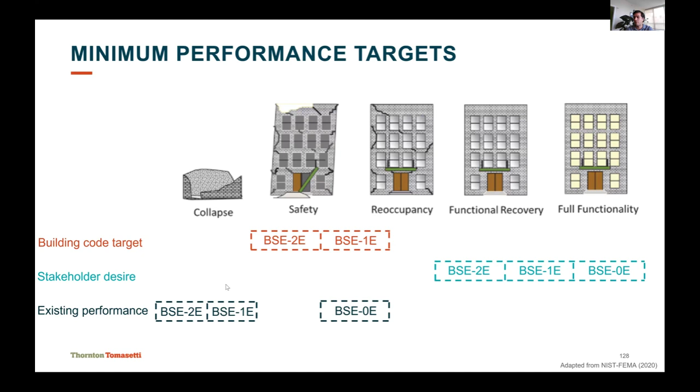In a nutshell, this is what the building code targets for existing buildings: something around these lines, again, life safety. The stakeholder really desires something really good around the functional recovery for the stronger event and full recovery for the lower event. What our analysis, doing basic ASCE 41 deterministic risk assessments, shows us is that the building is way far from that expectation and also under the building code targets.

So the reason why that's the case is, as you can expect, this non-ductile concrete building, built about the 60s or 70s, had a lot of issues with ductility detailing, with the proper location of lap splices and all that good detailing that wasn't done at the time.

But the thing is, after doing those evaluations, the client found that those evaluations with ASCE 41 are really helpful to answer the question of whether the building needs retrofit and what the scope of the retrofit should be.

But this stakeholder had more questions. Specifically, they wanted to know if the building was safe compared to a new building, or how safe it was. They wanted a number on that safety. And they also wanted to know if tenants needed to evacuate and wait for the retrofit, which is something that's way out of the scope of what evaluations like ASCE 41 can do. But it's something that probabilistic risk assessments can answer.

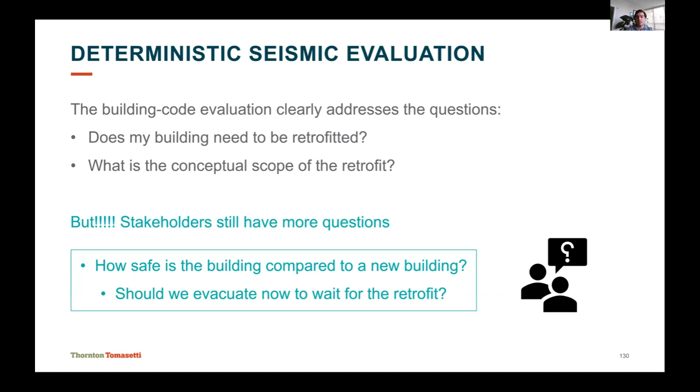But if you plan to use it for five years, which is the scope or the time expected for the retrofit, the risk is a lot lower. Yes, it's higher than the new building, but it's lower than what you were already accepting on a new building planning to use it for 50 years. So it makes sense to stay in the building, wait for the retrofit, and then continue using it after solving the long-term problem.

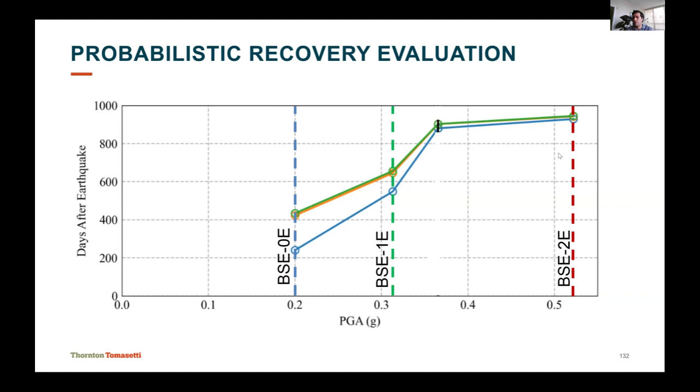So that's the state where this project is going. Of course, we also did some recovery simulations to estimate functional recovery time, and we are in the works coming up with retrofit concepts that will address these long recovery times, which you can see plateau at the higher levels, indicating demolition and reconstruction of the building as the most likely case scenario.

So I think that concludes all of what we had to present today, going all the way from forensic engineering to our latest projects in recovery-based design.